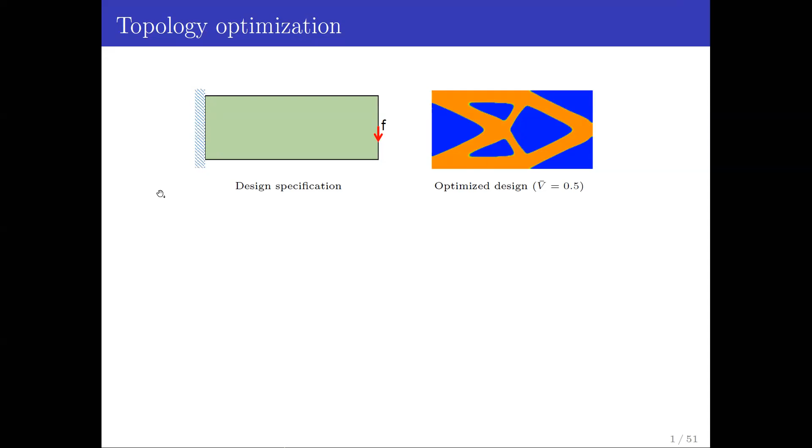Here I show you an animation. Starting initially with green color, it gradually evolves into blue and orange, that is void and solid. You start with intermediate density. Density here is a pseudo representation of different types of material, from intermediate density to void and solid. This density-based topology optimization is perhaps the most widely used method.

For example, this can be used for heat conduction. You can see very intricate details emerge as a process of topology optimization. You can also use it for thermal fluid problems where we solve Navier-Stokes equations. Here you can see very complex geometric features emerge.

These are component designs, as shown in a paper where they used a giga-voxel method to design aircraft wing structures. You can see very complex structures can be used. By now, topology optimization is a quite mature method.

So we're looking at density-based methods. There are other methods like level set, phase field, or topological derivatives. As you can see, complex geometry or topology can emerge from this software or tool.

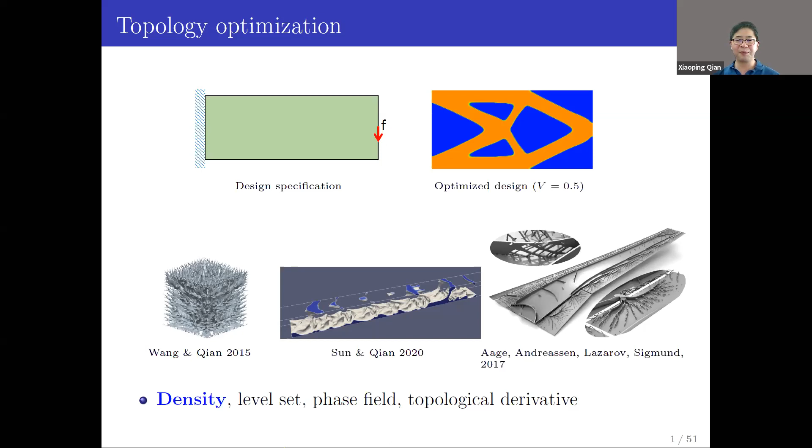So how do we fabricate it? That's where additive manufacturing comes in. You can see here a very nice part has been built. Additive manufacturing is capable of building parts of very complex shape without part-specific fixturing or tooling.

The reason it can do so is because it introduces something we call sacrificial support structure. Support structures here are only to support the part building process. It itself is a waste of material and waste of build time. If possible, we would like to get rid of it. Also, in some manufacturing processes, such as metal additive manufacturing, getting rid of this support structure can be a challenge. In metal parts, to remove support you would have to use wire EDM, which has accessibility issues and requires special tooling for removing metal support structures.

So the question arises: is it possible to design these parts so that they can be printed without support structure? We want to answer the question: can we do topological optimization during the design stage so that the resulting design can be printed automatically? That's what we want to address.

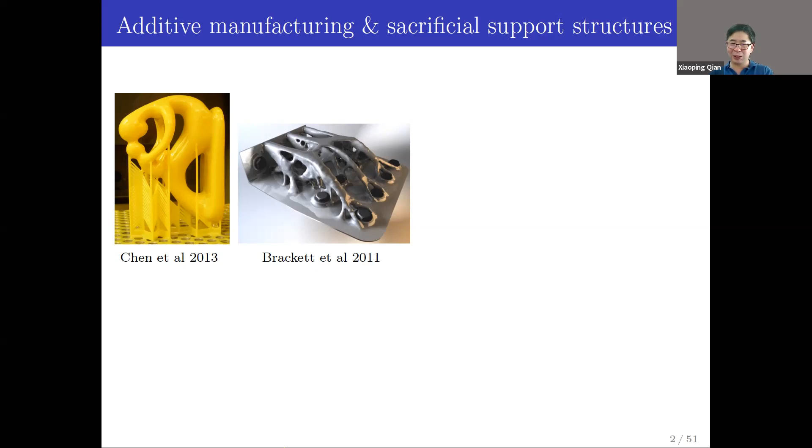The other type of problem we thought this could be relevant to is the case of support structure. As you can see, people are already looking at perhaps needing some porosity in the support structure. Depending on load, we have lighter materials, so we have higher porosity. Then we want to ask, can we design in a more principled method, based on mechanistic design or topology optimization, to design the support structure?

Here you can see this utilizes the idea of a tree to support this structure. Can we also use a mechanics-based design to come up with the support structure? Keep in mind, these trees are designed so that they meet a particular overhang angle, so the part can self-support. So the idea is you want the support to self-support.

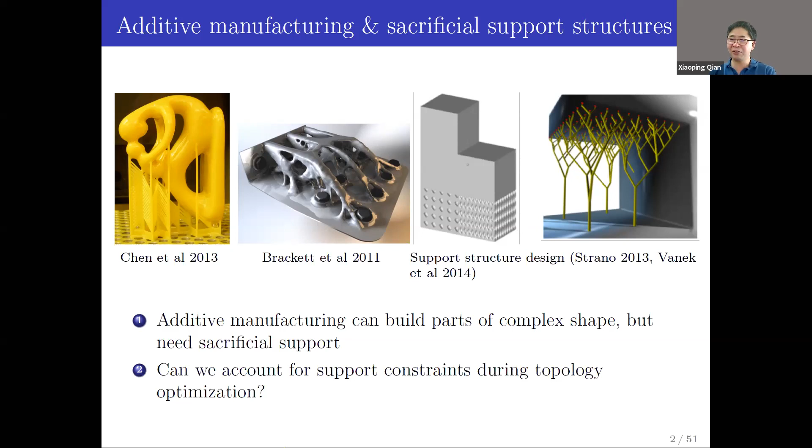So you don't want a support structure for a support structure. This is a problem we want to address. We want to account for additive manufacturability during topology optimization. So how can we account for this support constraint during topology optimization? That is what we want to address.

Let's look at the technical issue we're addressing. This is a very common MBB beam. If you're looking at this structure, you can see where you need support structure. Looking at boundary C, perhaps you don't need support because you're facing up. Looking at boundary B, you're facing down, so you do need support. Looking at boundary A, you may or may not, because it depends on the overhang angle of the part and also the process capability. You may or may not need support here.

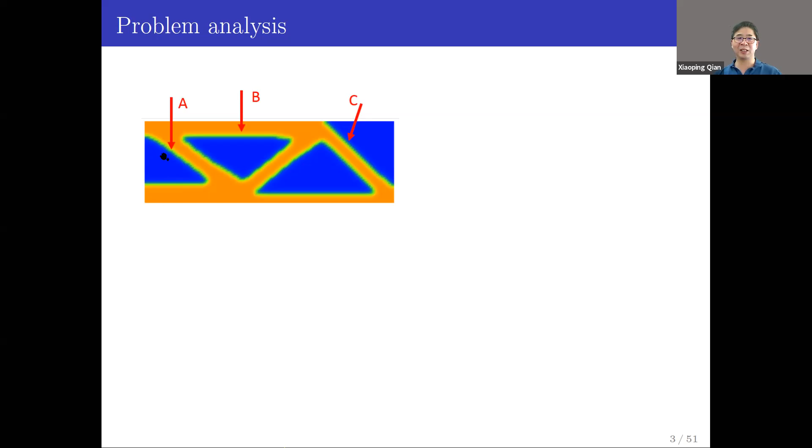So the challenge is, to determine where you need support, you really need to know the boundary slope. But in density-based topology optimization, there's no explicit definition of boundary because each element or node's density evolves independently and the boundary is evolving. So how do you relate this support to a point-wise density in a differentiable manner is an interesting challenge.

There are other methods, for example based on filtering, that are not necessarily using a gradient-based approach. We're interested in using a gradient-based approach for topology optimization. The reason is topology optimization commonly involves multi-million elements or nodes, sometimes even billion element nodes, so a very large number of optimization variables. Traditional evolutionary methods would be inefficient, so we prefer a gradient-based approach. How we relate this support structure to the density in a differentiable manner is a non-trivial issue.

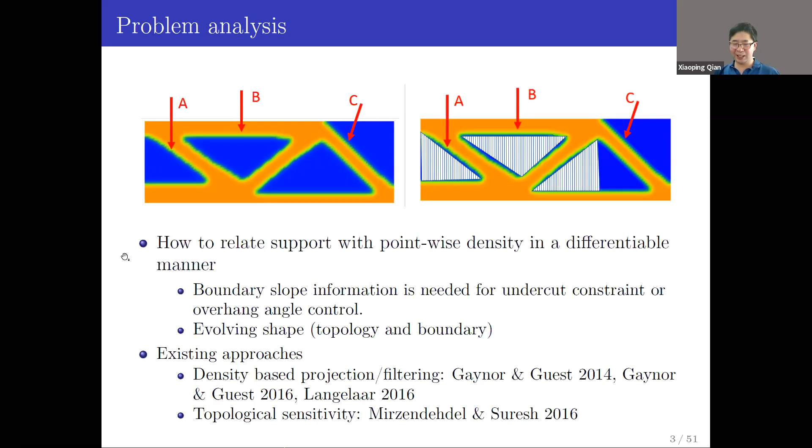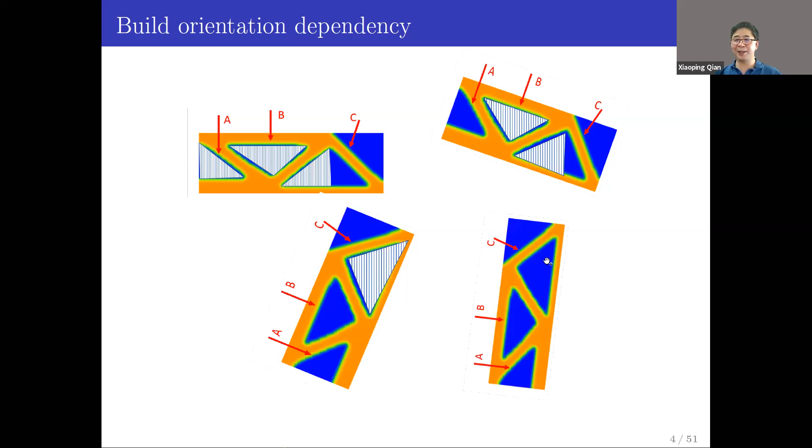If this isn't challenging enough, let's look at another aspect. This support structure apparently depends on the build orientation. If I change this domain a little bit, rotated, with build orientation still vertical, you can see this area no longer needs support because this part can self-support now. If I rotate this part the other way, only this part needs support, these do not need support. If I rotate this domain slightly more, like here, you can see even in this area we do not need support.

So you can see the support volume is actually not differentiable with respect to orientation. How can we handle that during topology optimization? I think that is an open challenge.

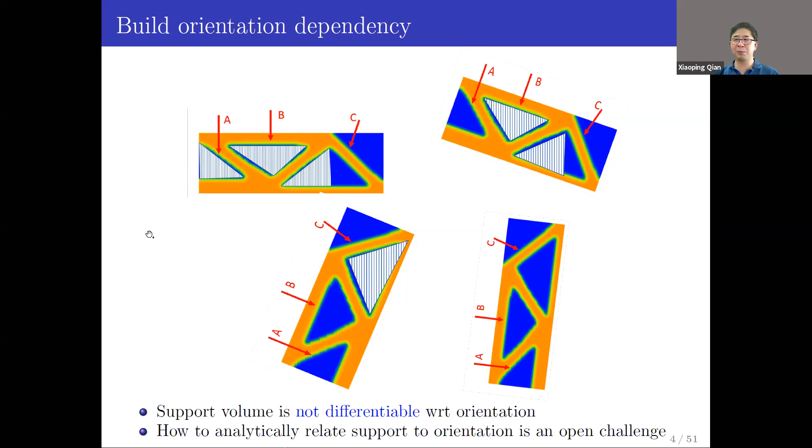Right now there's a lot of active research trying to tackle this issue, but people try to assume a build direction and then do topology optimization, or they sample build orientations. Here, we want to present all these issues with one formulation that is differentiable with respect to both orientation and density. This is what I want to talk about today.

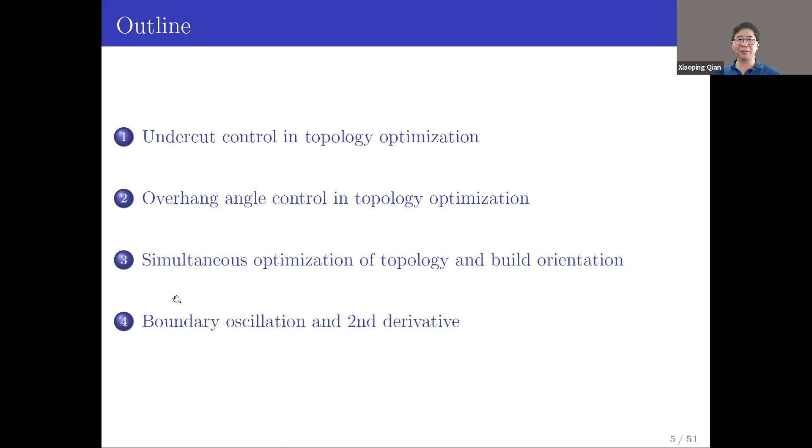So we want to talk about how we can control the undercut during topology optimization, how we can control the overhang angle so the part can self-support, and how we control topology as well as build orientation in the optimization process. We will introduce one formulation that can tackle all three problems, and then show you an artifact of our formulation and how we can use a second derivative-based measure to overcome this artifact. That's what we're going to talk about today.

What we're going to talk about can be represented through one concept we call the projected undercut perimeter. If this is a design domain, assuming build direction B, only this shaded area actually needs support. This is an undercut. The amount of undercut I'm going to characterize by the horizontal length, which we call the projected undercut perimeter. If it's 3D, that will be a horizontal area. You can see if this P becomes small, the amount of support becomes small. When P becomes 0, there's no support needed.

So how do we compute that? We know this density is 1, this area is 0. So the density gradient, this gamma representing density, points in this direction. Its dot product with the build direction gives cosine alpha. This alpha becomes the overhang angle, as you can see. So this directional derivative of density, or density gradient, with build direction B, dot product gives the overhang angle.

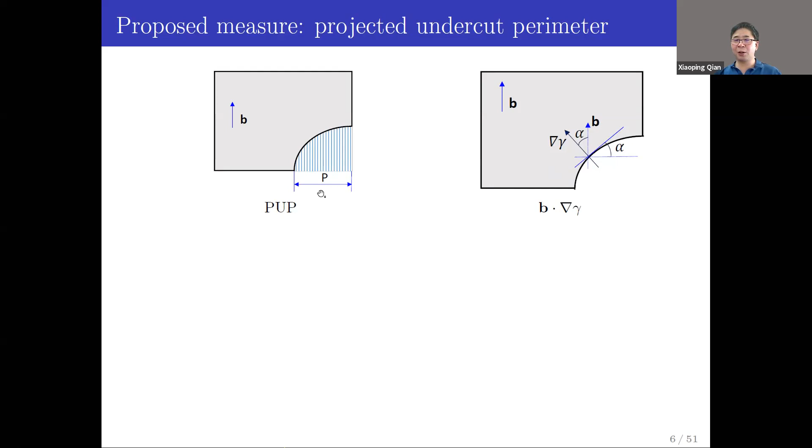So we compute this PUP, projected undercut perimeter P, by a volume integral. This quantity can be computed pointwise, and then this gives you overhang angle. So we suppress that facing upward where you do not need support. Then we do a volume integral. That's the idea of PUP. With this idea, we can compute the support structure bypassing the need for explicit boundary.

And we utilize the fact that in optimization for a converged design, density gradient only exists on the boundary. It vanishes from interior to exterior. And this formulation is differentiable with respect to both build orientation B and density gamma.

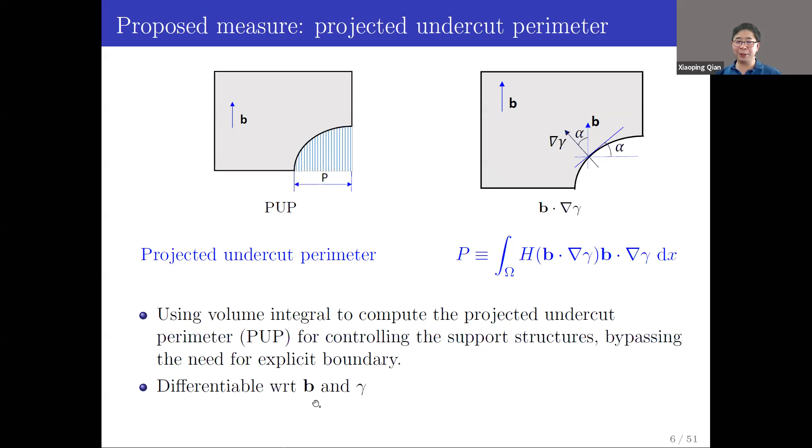So here, let me show you this example we showed you earlier. For this part, if I'm looking at the directional derivative here, you can see this B facing downward. So density goes from 0 to large, density gradient goes up, and the build direction up, so the directional derivative is positive. On the other hand, here is negative. On the side is negative, and here is positive. So here you can see only the positive area potentially needs support.

So I'm going to use heaviside to suppress those things. That's the positive that could potentially need support. If I do an integral of this one, that gives you the measure of P, the horizontal length. So here is the design, the horizontal length of 2. You see the measure of horizontal length, the sum is 2. The design domain is 6.

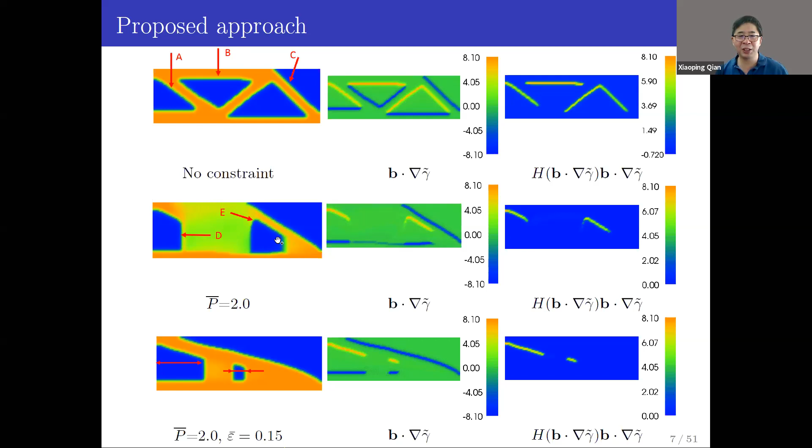So we have a geometric measure, this P, that characterizes the horizontal length or area you need support. And again, this is directional derivative with heaviside suppression. So here you just do a volume integral, and this thing is differentiable with respect to density. And if you have a grayscale design, you would have a similar measure here. Density gradient only appears on the boundary. So that's what you have.

And then we apply this formulation into topology optimization. This is like a classic optimization formulation, density-based. We're looking for displacement and distribution of materials. Here we solve a minimum compliance problem with equilibrium equations and a volume fraction constraint. Gamma is density. Here the PUP constraint is the horizontal length or area you need support.

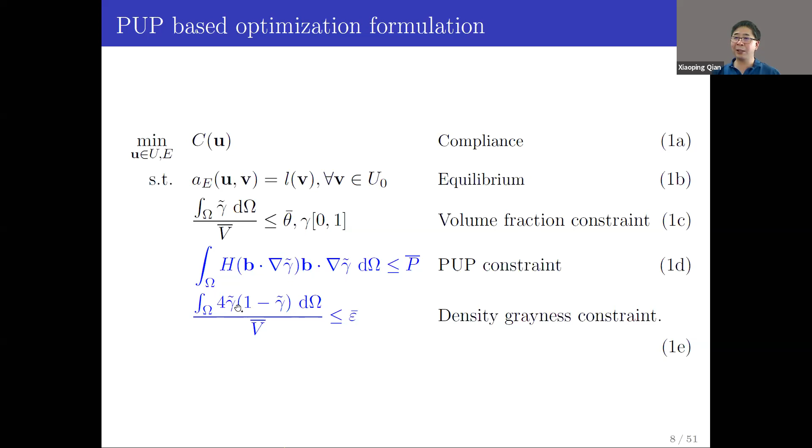It should be smaller than a threshold. And this is the grayness constraint. So when gamma equals 0 or 1, this becomes 0. Otherwise, we penalize intermediate density. And then here we can see how this one looks.

In a 2D design, you can see this is the allowed PUP constraint. Initially P is 3.5, 3, 2.5, and 2, a very small number, 0.1. So you can see that the allowed support structure becomes smaller and smaller. So we can see indeed this PUP controls the amount of undercut.

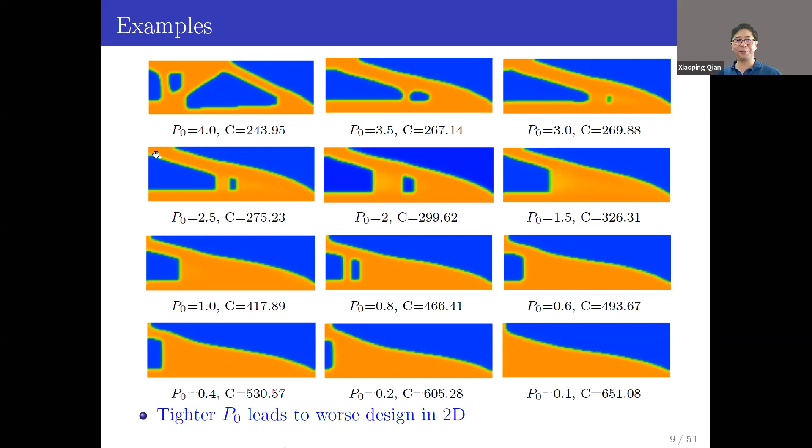And you can also notice as we tighten this P, the cost function goes up. So in 2D, when you tighten the constraint, the design's cost function is worse off, so the compliance here. And the same idea can be applied in three dimensions.

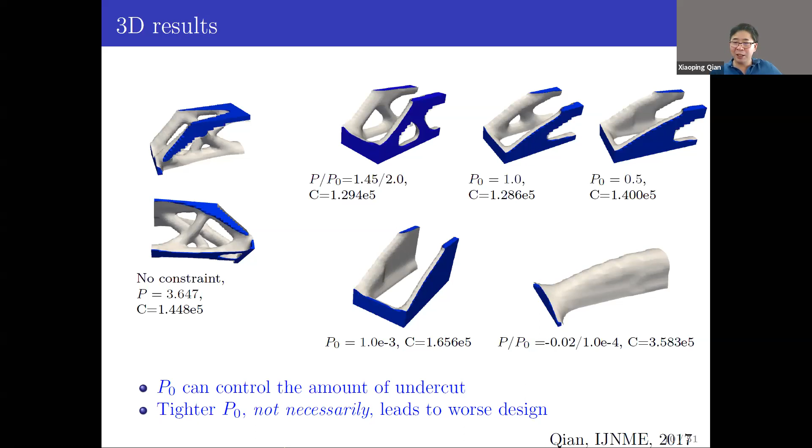The reason this one is not necessarily worse off when P is very tight, we believe, is because there could be many local minima in the 3D design. The 3D design space is much larger. So we can see this P formulation, or PUP formulation, really allows us to control the amount of undercut.

Now we would like to extend this formulation to overhang angle. The idea is still the same. Instead of just heaviside thresholding the downward-facing boundary, we're only thresholding its boundary slope that is smaller than alpha 0. So here we're looking at thresholding not the directional derivative, but rather the normalized directional derivative, because this one corresponds to overhang angle. So only overhang angle smaller than alpha 0 is measured in this part. When this part is smaller than the threshold, basically everywhere else is like this one, so the part can be printed without support.

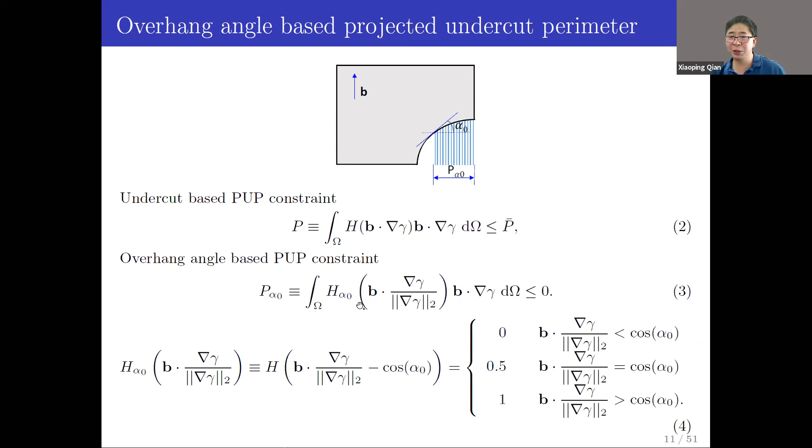So that's the only difference between undercut-based formulation versus overhang angle-based formulation, where we do Heaviside thresholding. With that, this is our formulation.

Again, the same previous standard formulation: compliance cost function, equilibrium equation, volume constraint, where here is the PUP constraint. We replace this Heaviside from positive and negative to a particular overhang angle.

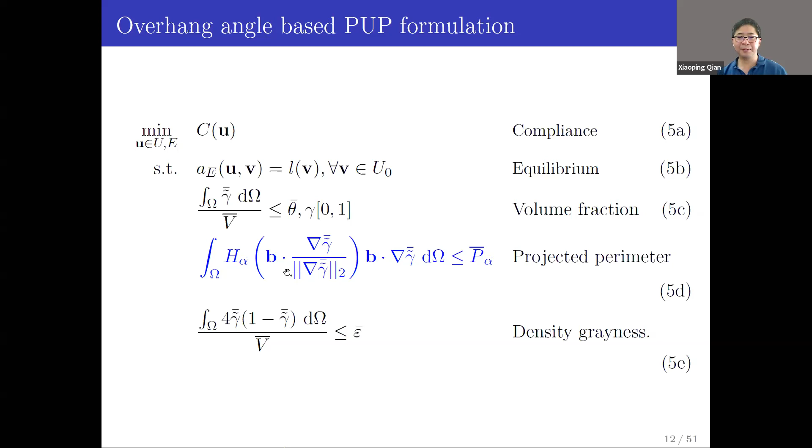Here's the example: this is a 30-degree overhang angle, and this is the optimized design. You can see if I take a directional derivative, that's shown here. Downward is positive, upward is negative. If I take this normalized directional derivative, that's what we have for Heaviside.

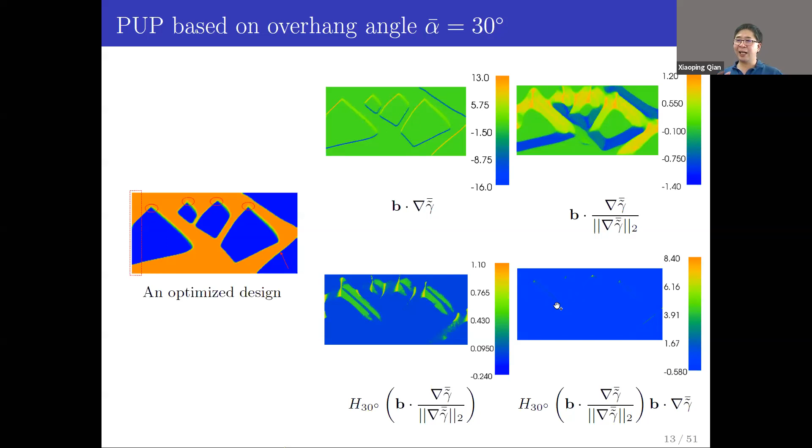We do a dot product, and that's where the constraint is violated. As you can see, this is very small. If you tighten it, that can effectively control the overhang angle.

And this is an animation. You can see initial intermediate density in green. As the optimization evolves, it becomes blue, which is void, or orange, which is solid. You can also see this design boundary meets the 30-degree overhang angle.

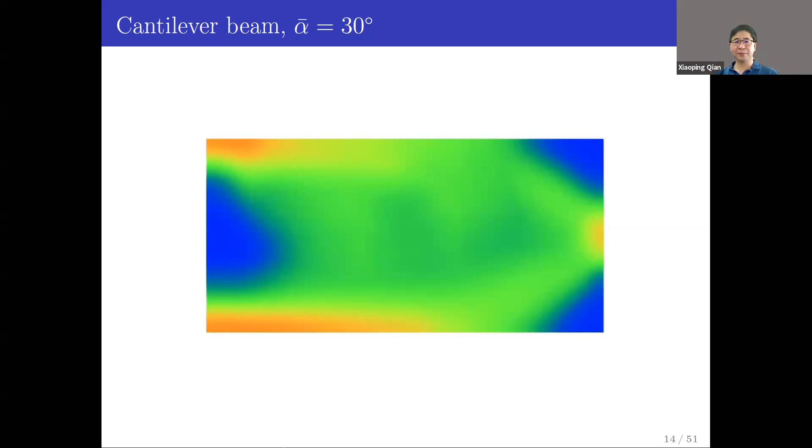Here is an example of different overhang angles. Without the overhang constraint, that's the design you see. You can see you have a downward-facing design, so this would need support structures.

Now if I impose 15 degrees, 30 degrees, 45, 60, to 75 degrees, and look at the minimum overhang angle of each design, you can see this evolution from A, B, C, D, E. Indeed, this P-alpha controls the overhang angle of the design, and the cost function goes up if you tighten this overhang angle.

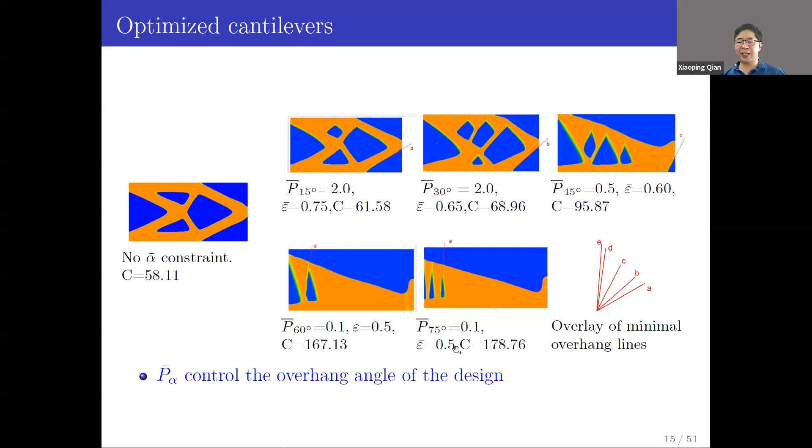One thing we should be careful about is sometimes you may notice that this type of design appears to satisfy the overhang angle everywhere, but you may not be able to print this design without a support structure on the side. To address this, we just impose a side zone constraint where we impose a normal.

Here we use boundary left-side normal, right-side normal. We use a Heaviside function where any surface facing basically downward on this side—if we do a projection, that's what we have.

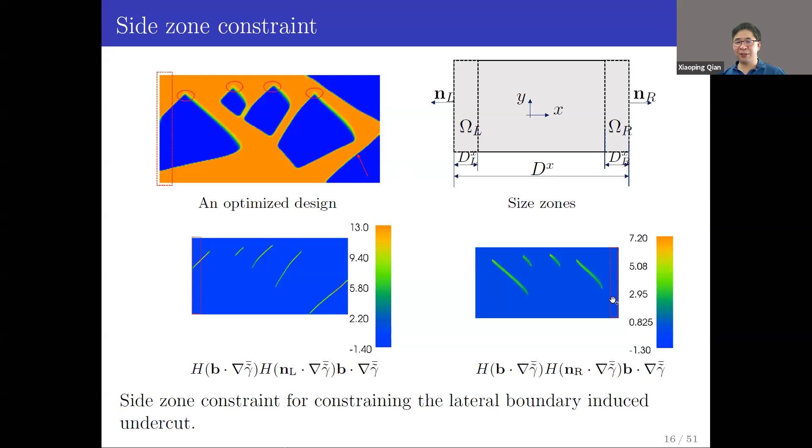If we control this one, you will see this side is controlled and that side will not be affected. And if we do this one, this will not be affected. If I impose the side zone constraint, that's what you have.

So here is what you have, and here is the resulting design. You can see different optimal designs could emerge if you impose the side zone constraint.

The design will self-support without much penalty to the cost function. This idea is readily extendable to three dimensions—here's a part. This part can self-support, and you can look at the animations here.

This is printed on an FDM machine, where commercial software using Dimension Elite automatically adds this black color support structure. If we use a part printed on the DaVinci 2.0 with an open-source FDM machine, you can see this part is printed on the machine—it can be printed without the support.

For this part, it leads to a substantial amount of saving on support structure. So we don't need this amount of material.

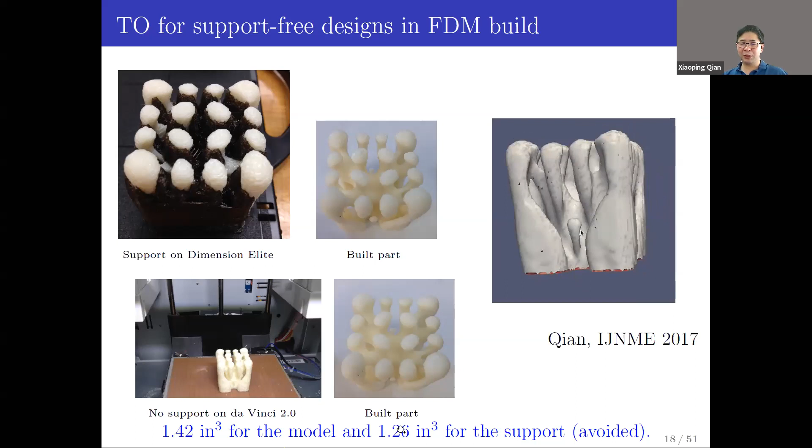Now we have an approach to control the part so it can self-support. Where can we apply this feature? Well, the obvious place is to use this to design support structures.

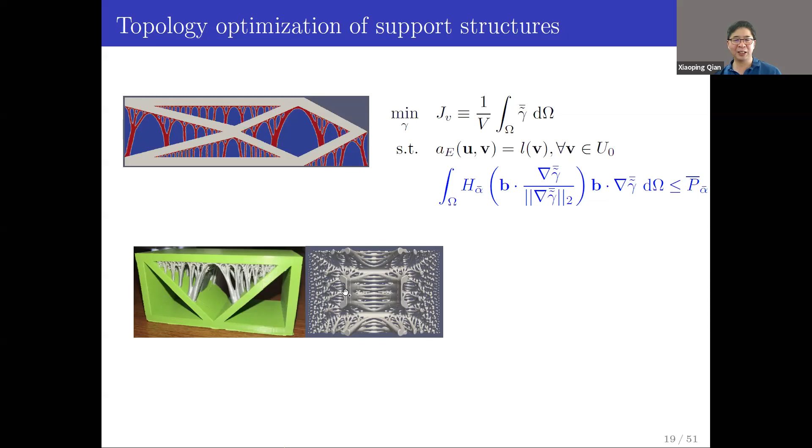This work was done by Francesco and Vlad here in my group.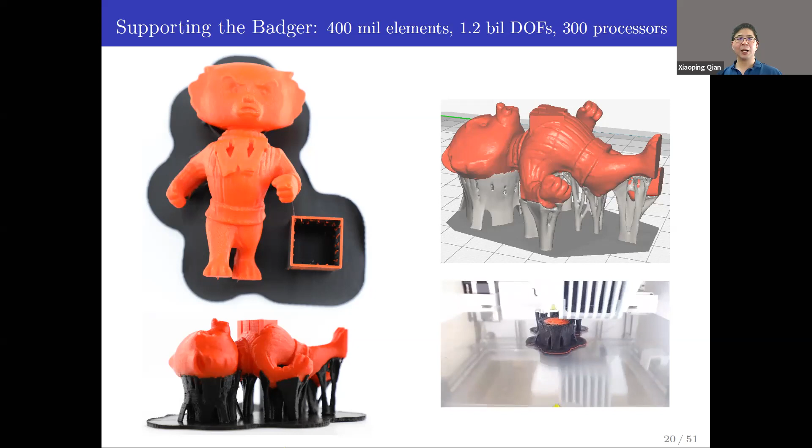Now I can show you a few more examples. Here we want to design a support structure for a dome, and this is top, like a hemisphere dome. This is the design support structure. Depending on the height of the dome, we get different structures here, and all these structures are self-supporting.

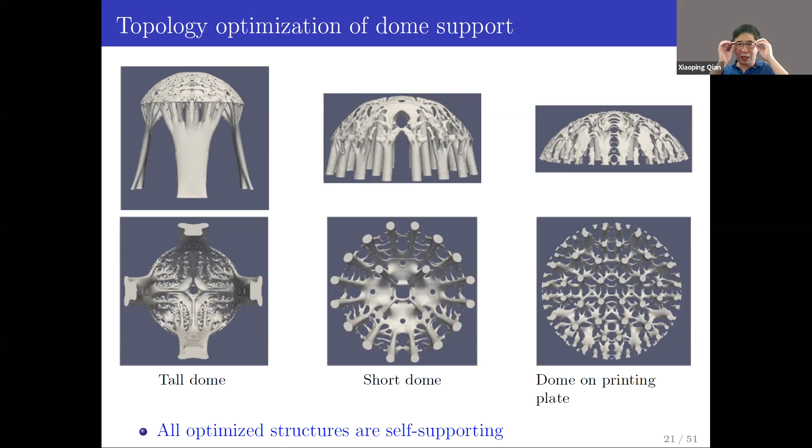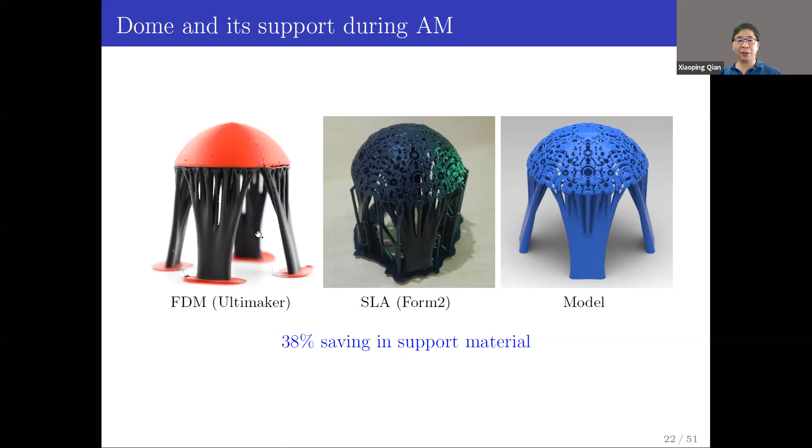One thing we noticed is that although we have this PUP constraint to design support structure so they can self-support, in practice our formulation, when we impose mechanical load under minimum compliance elasticity problem to minimize volume, it turns out the support structure can self-support. Our overhang constraint is rarely active. Here's the actual printed part in an FDM machine, an SLA part, here's a model, and here's a printed part. All these things can self-support.

Now with this, we get the capability of controlling slope for support control. We can also use this to control surface roughness. So the idea is the following.

If this is for a heat conduction problem, if I control the overhang at 30, 45, or 60 degrees, this part can be printed without a support structure, depending on the process capability of your machine, whether you need support or not. Now, sometimes you want it the other way.

Instead of all the part facing up, you want the part slope facing down. The reason or assumption is the following: when you have a part surface facing downward, typically the surface roughness is bad, so you have a very coarse surface. That could actually be advantageous, taken advantage of. When the surface is rough, sometimes you can transfer heat better, so you can promote heat transfer. That can be beneficial in thermal management applications.

So if you want downward facing surfaces for heat conduction, this sort of design you would have. Here we use the same formulation, all we need is to control the boundary slope. This is upward, this is downward, now you can control both upward and downward slope. So we can essentially have different ways of controlling boundary slope in order to enable support control or surface roughness control.

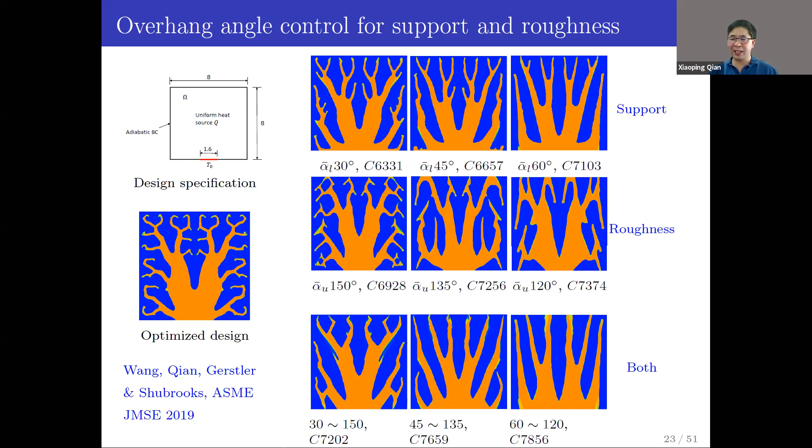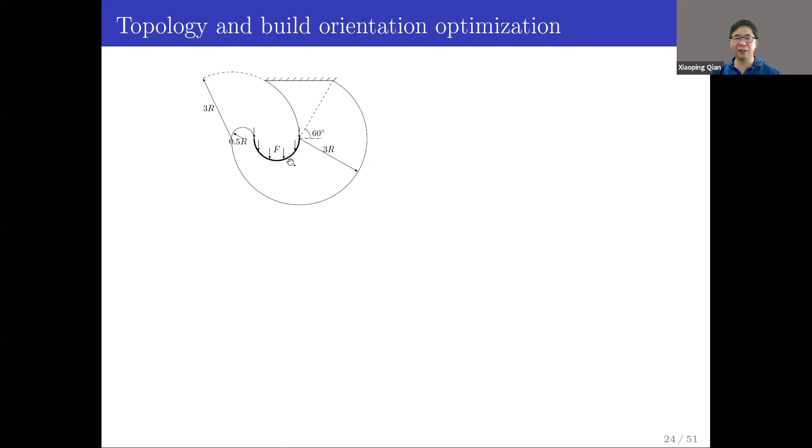Now we have explained how this PUP formulation enables undercut control as well as overhang control. Now let's look at how it can be used for orientation optimization. Suppose we have a two-dimensional structure. This is the design domain, here is fixed, we have a load, it's a hook. If I do not have any orientation control, this is the optimized structure. You can see for this kind of design, there's no particular orientation you can choose that can be printed without a support structure. So we want to find a structure that can be printed without support structure.

And here's what we found. B star is the optimal build orientation, here with 45-degree overhang angle, and this is the part. If I build along this direction, this part can be built without any support structure. So here we're using B as the build orientation.

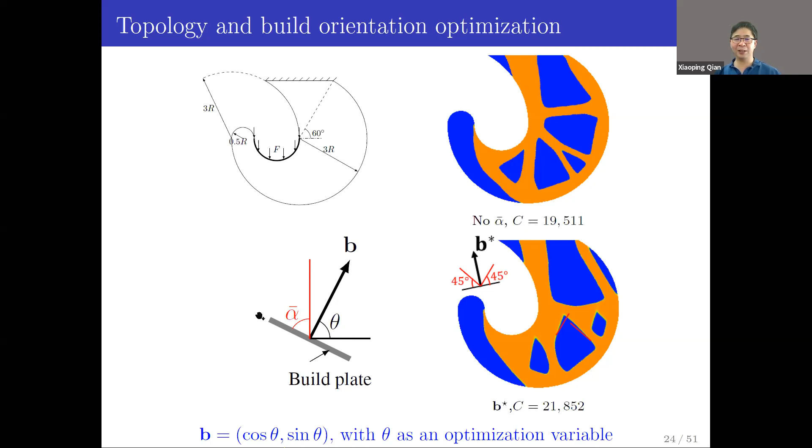It's parameterized by angle theta with respect to the horizontal axis. With respect to B, the build direction, you can define a horizontal plate, and then you have this overhang angle alpha. That's our notation here. Our PUP formulation defines undercut smaller than overhang, smaller than alpha, this is length, this is P. If you rotate, you can also define this projected length, that's the definition.

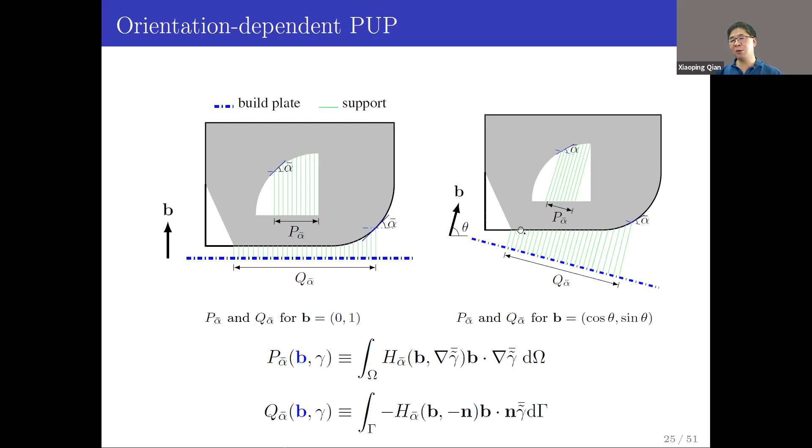Previously we assumed a fixed B, now we make B a variable, so this is differentiable with respect to B. In addition, we also define external support, this is the area that needs support based on density here. We define this boundary Q, which controls the support outside of the design domain.

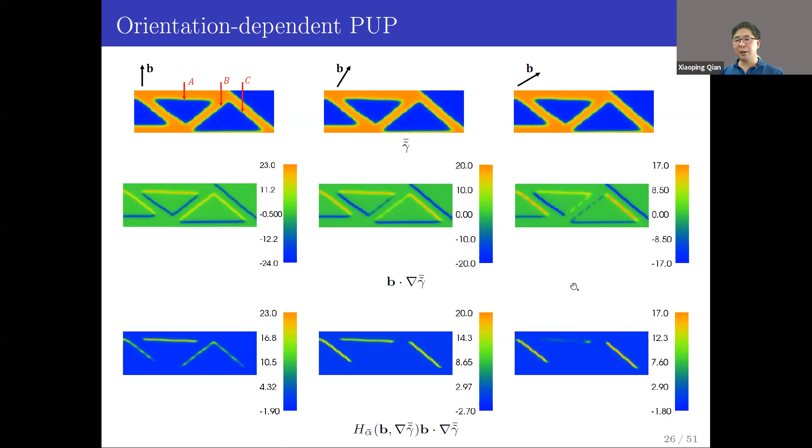Looking at this orientation change, you can see this part, the ABC boundary. If I change the build orientation B, the directional derivative changes here. For example, here it becomes a little lighter, here it almost vanishes, and here it vanishes. If you're using Heaviside, this part disappears. That is to say, this slope does not need support at all if you build along this direction. On the other hand, this slope needs support in this direction. So point-wise, the directional derivative is differentiable with respect to this build orientation.

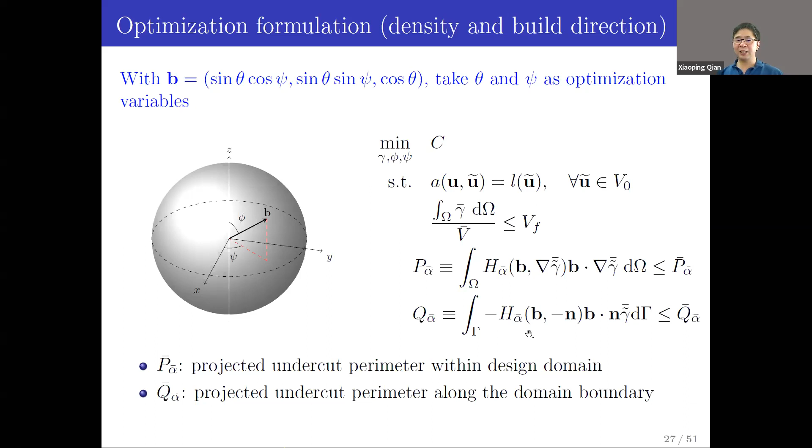And that's our formulation. Let's look at the beam here. If I don't impose any overhang angle, that's the design we have.

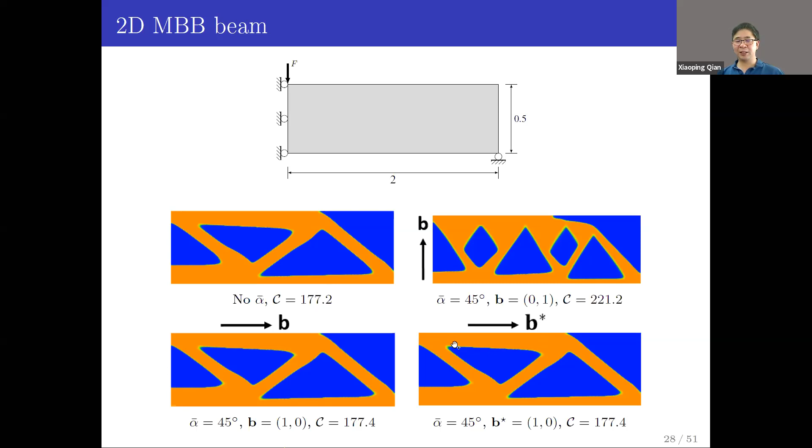Now with our approach, we can do gradient-based optimization. We found optimized build direction also along this design. So it's nearly identical to this design. You can see this optimized design and no constraint design are nearly identical. So orientation optimization is capable of finding the best orientation here for this particular example.

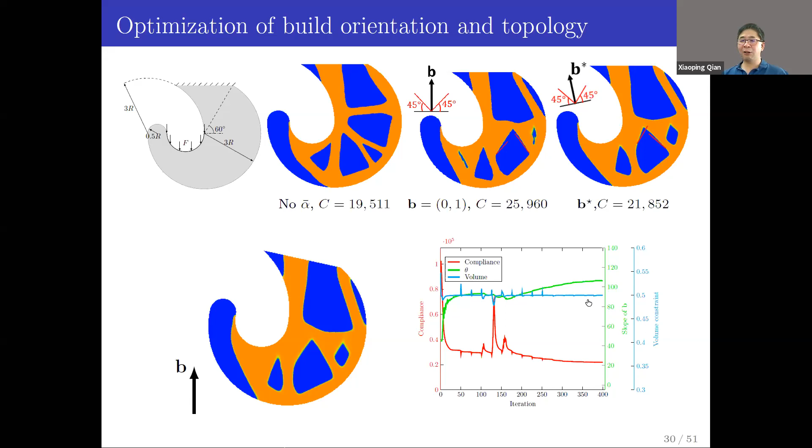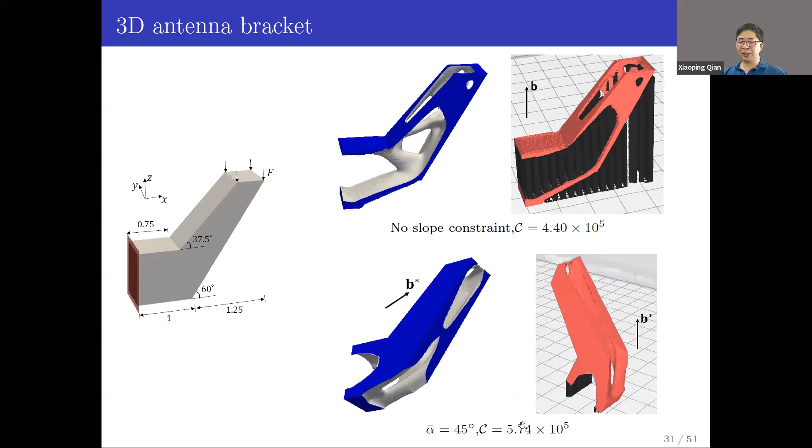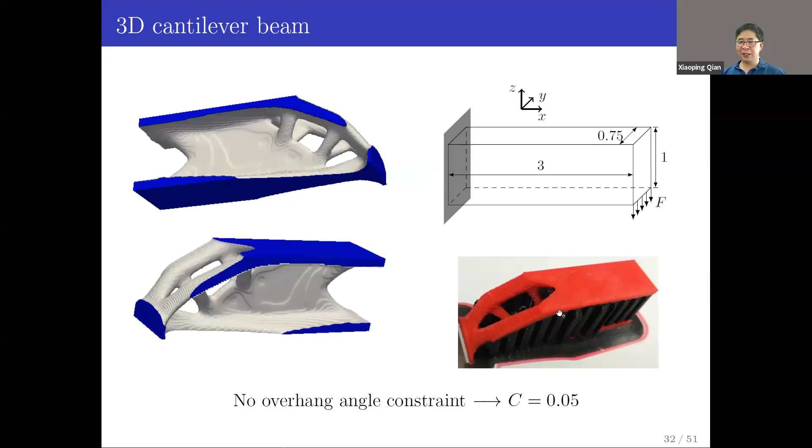And then here's the 3D beam. You can see this one, the optimized 3D beam, it needs support structures. And there's actually, in fact, a lot of support structure. If you don't impose any overhang angle, it needs a lot of support structures.

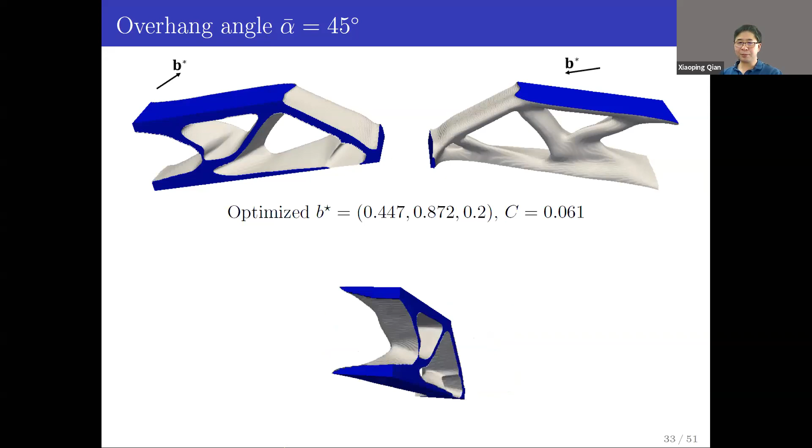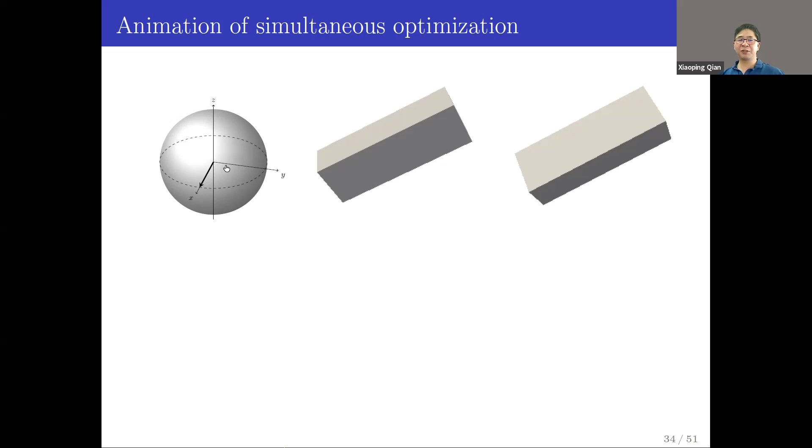And here is a visualization of the optimization process. We're visualizing orientation on the Gaussian sphere. Each point on this Gaussian sphere represents the orientation. And here is the design domain. You see density evolution, you see orientation evolution here. Different colors represent a cost function here.

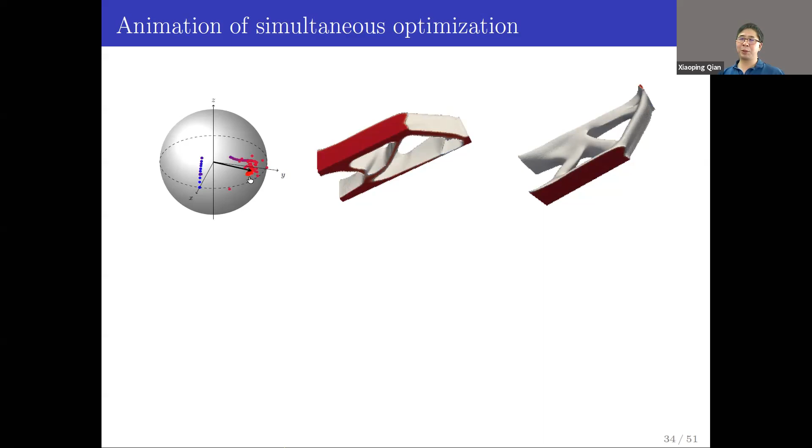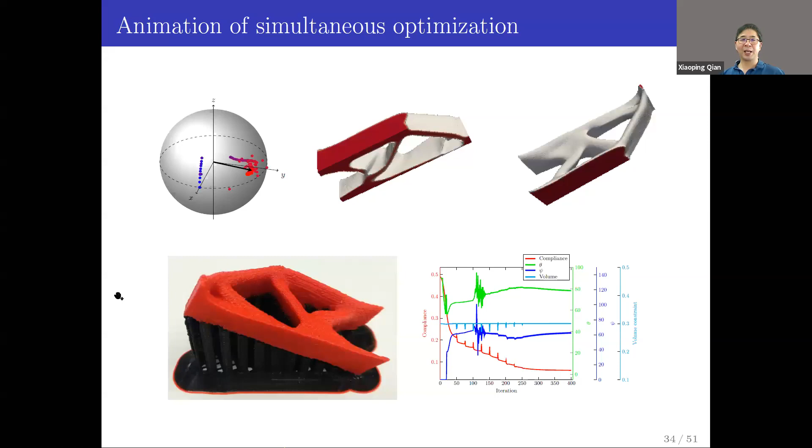You see convergent angle, and this cyan color is the volume constraint. All these constraints are active. If I fix this orientation and optimize build orientation, rotating it this way, the design domain becomes this.

If I take a cross section and cut it, you can see the part boundary along this red line. This red line is a 45-degree overhang with respect to this optimized build direction. So this boundary is along 45 degrees - that's the overhang angle constraint being active.

So this part can be printed without any support inside this design domain, but it does require a lot of support structure outside the design domain. If we impose our earlier formulation Q, which is external support, you can see this part does not need any external support.

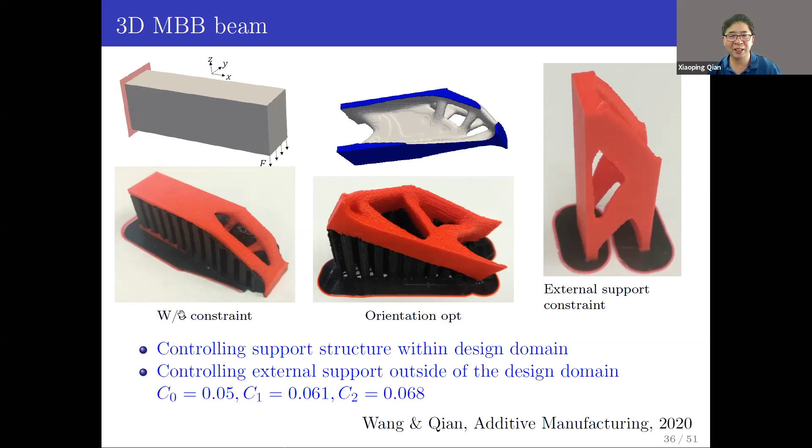So now I have shown you how our PUP formulation is differentiable with respect to density or orientation. It can be used to control undercut, overhang angle, as well as optimize build orientation. Now I just want to quickly go over an artifact of our formulation.

If we impose overhang angle, you can see this is perhaps 45-degree overhang angle. Everywhere the volume constraint and angle constraint are satisfied, except these 3 points where you have a downward facing point - the part cannot be printed here. Even with the integral formulation the constraint is fine, but you get this oscillation.

In our initial formulation, to overcome this issue, we increase the filter size. For example, at 15 you have this issue, at 20 the oscillation is somewhat suppressed but still a little bit there, and at 25 you don't have oscillation.

By the way, our formulation is also applicable to level set methods. This has been applied in the context of level set, and this oscillation issue also appears in level-set-based implementations. It has been noted by Allaire as the dripping effect.

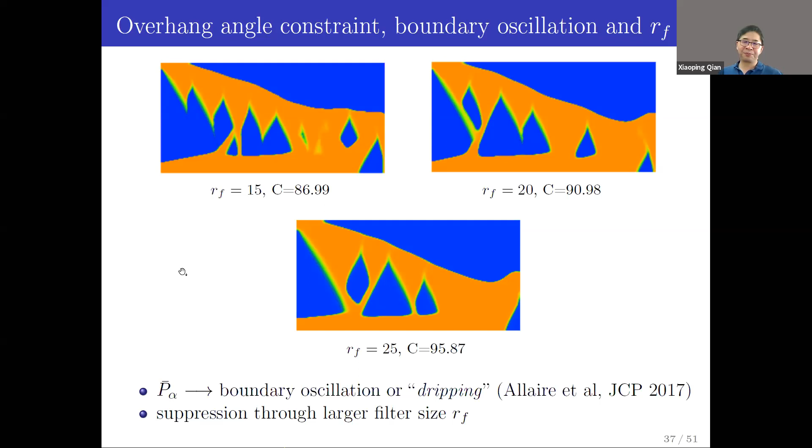So how do we overcome this boundary oscillation when we do this overhang angle based constraint formulation or density gradient based formulation? We recently took a look at this issue - this is work done by Francesco. Here is a design without overhang, that's what we have.

If with overhang, you can see point-wise you have constraint violation that causes this oscillation, making the part not printable. So how do we overcome this? This is the problem we want to resolve. If we observe this oscillation, this is the problem - how do we get rid of it?

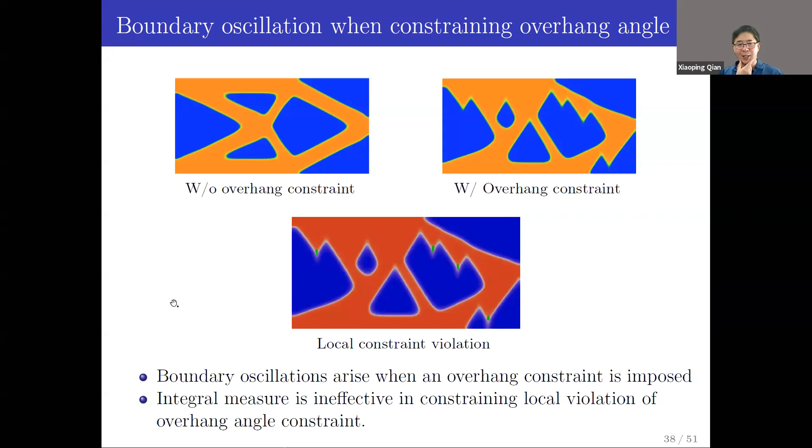So here's the idea we use: we want to characterize this oscillating boundary. In order for a boundary to oscillate, there has to be a tip, and of course if you have a tip, you also have a valley. This valley is perhaps somewhat similar to the top of this horizontal hole here. Now, how do we characterize these things?

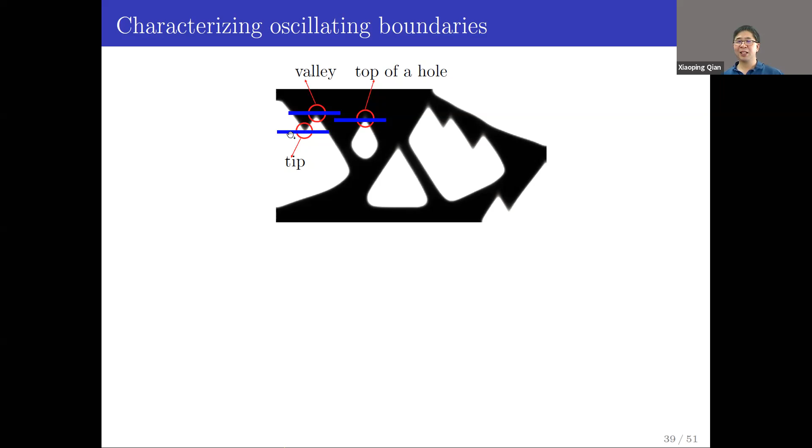If we draw a horizontal line and look at the density variation across it, we see the difference between the tip and the valley lies in the second derivative. For the tip, the density variation goes from 0 to 1 to 0. For the valley, it goes from 1 to 0 to 1. So the second derivative for the tip is smaller than 0, and for the valley is larger than 0. Of course, the top of a hole is also larger than 0, as is a short horizontal overhang.

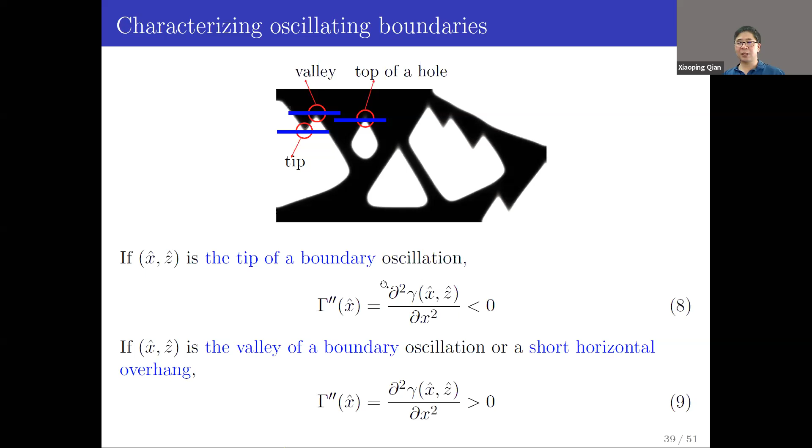So our assumption is: if you have boundary oscillation, you must have a tip. If we could just penalize the tip, we essentially get rid of the valley too. So that's what we call the second-derivative-based measure to remove oscillation - here is our oscillation measure using the second derivative. The second derivative extracts the tip, and the first derivative extracts the boundary.

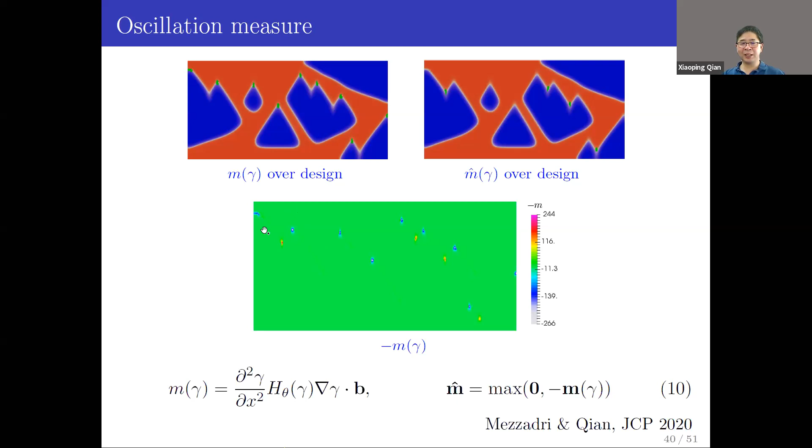Together, we can separate the valley from the tip - this is the measure, positive and negative here. More specifically, looking at the first derivative, that's this one; the second derivative shows positive and negative separating tip and valley. If I suppress the positive line, basically all the valleys have been suppressed. Looking at the directional derivative heaviside, this extracts all the tips and valleys based on the overhang angle.

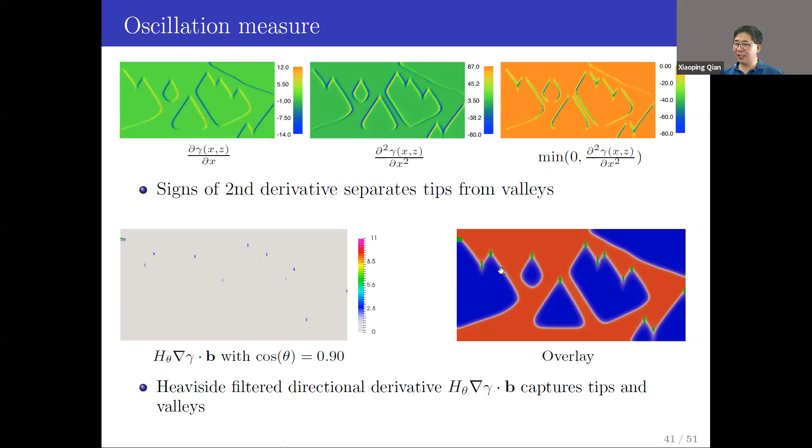If I do multiplication, then essentially I can extract the tips, so that allows us to penalize it. There are perhaps multiple ways to penalize this oscillation. We use two strategies: one is filtering, where we only penalize this density when there's oscillation, so this density is large only when the oscillation is large. Or we penalize with a cost function - integral of the oscillation using a P-norm, so that this is differentiable, designed so it can be used in a gradient-based formulation.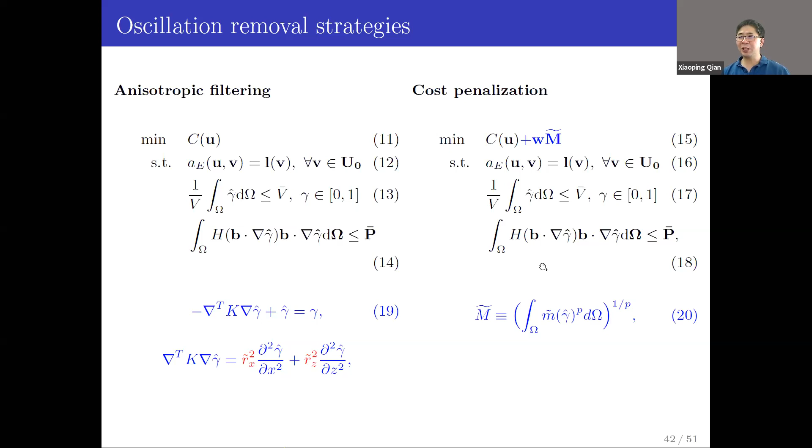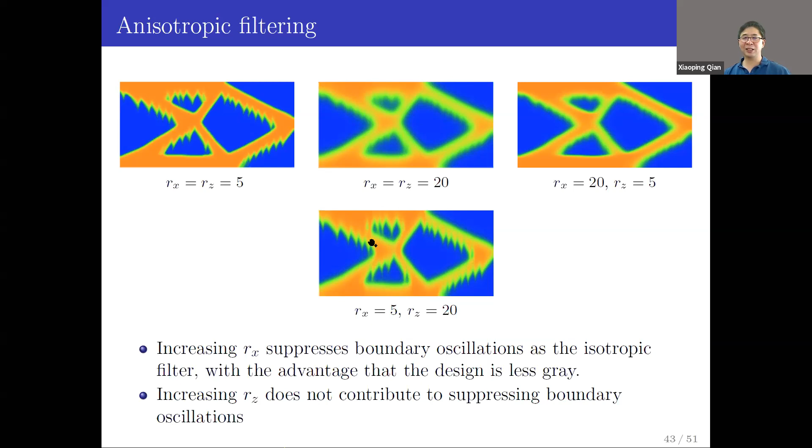Let's look at filtering. Here we're actually looking at anisotropic filtering. In our earlier formulation, if we use isotropic filtering, for example 5 to 20, this oscillation has been suppressed, but the design becomes a little bit gray. Now if we're only using large filter radius along the X direction, we also have the effect of suppressing the oscillation, but Z is small, so this makes the design a bit sharper, keeping it less gray. Increasing Z does not contribute to suppressing the boundary, as you can see here. That's why we use anisotropic and adaptive filtering.

So this is our formulation: if the oscillation is large, we increase this filter radius in the downward facing face - this is directional derivative facing the downward face. If the oscillation is small, we reduce the filter radius, allowing hole nucleation and topology evolution. So one control increases the radius, one controls reducing it.

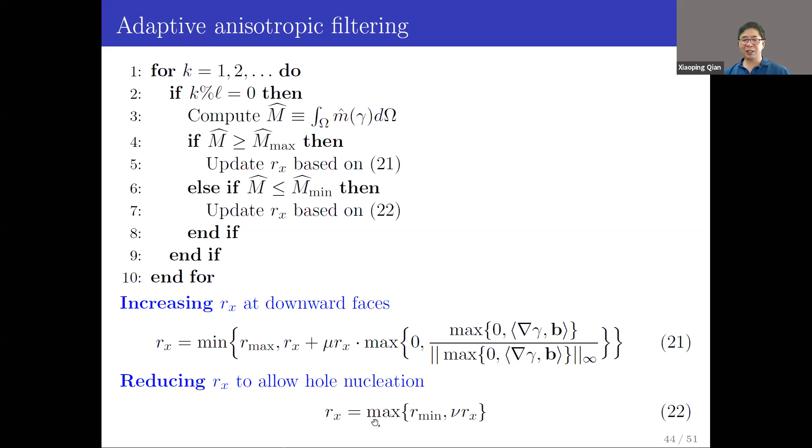Here's the design at 30 degree, 45, 60 overhang angles. This is with anisotropic filtering, and here is with cost penalization - you can see these are different designs. If you compare without the second derivative formulation for the cost function, you can see this delta C. Typically this leads to a better design here, and especially at high overhang angle, the design is substantially better with this formulation.

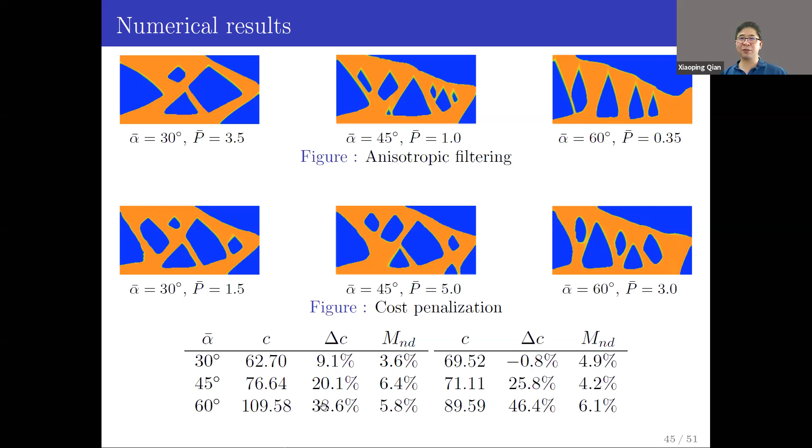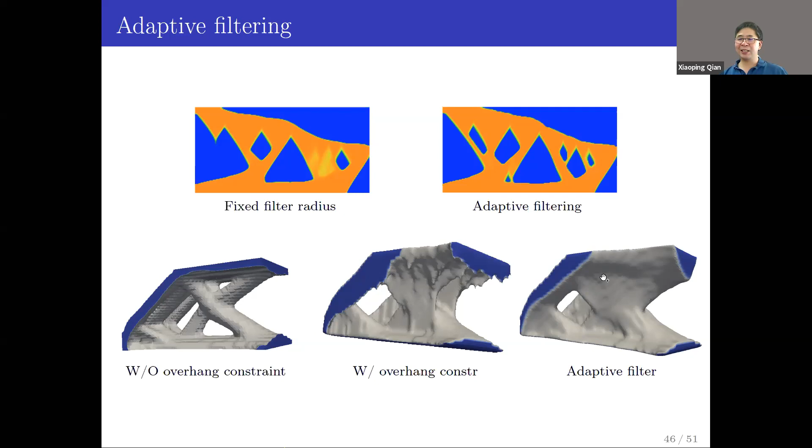With adaptive filtering, if you have overhang angle with large adaptive filter radius, this is the design. For 3D design without overhang angle constraint, you can see this one needs a support structure. With the imposed overhang angle, you need this 3-dimensional oscillation. With adaptive overhang angle, this part can be designed without support structure - it can be printed without support structure. And here is adaptive filtering.

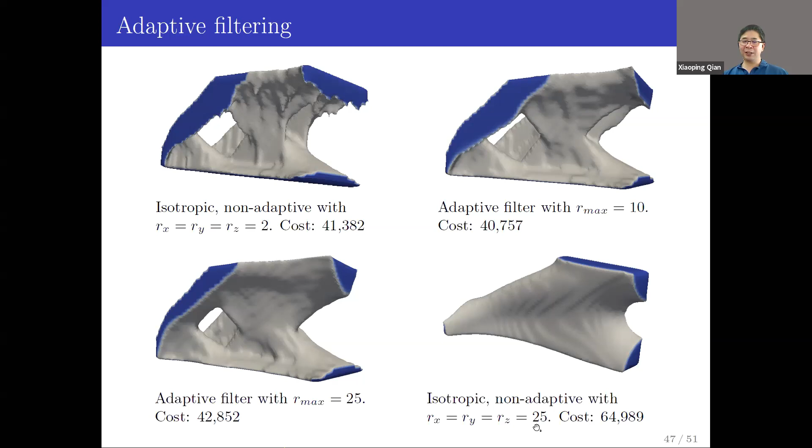Using non-adaptive filtering with a smaller filter, you have oscillation, and with a large filter, that's what you have - still perhaps a part that cannot be printed. Increasing to 25, that part can self-print. If we use isotropic filtering globally at 25 in all directions, this cost function is much worse than the anisotropic one. This is the design you would have.

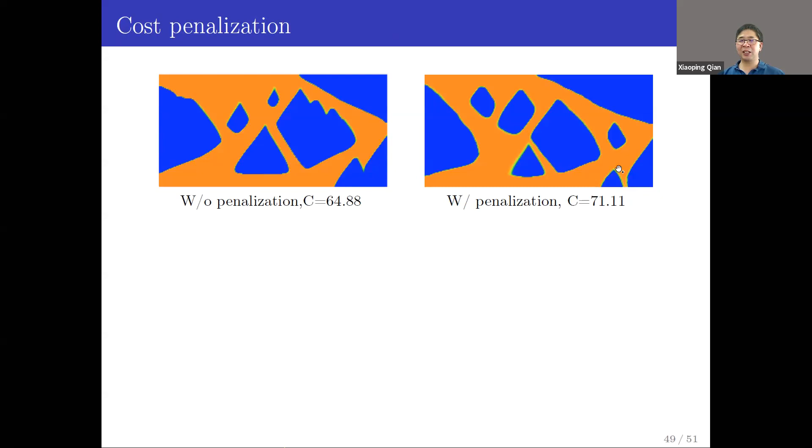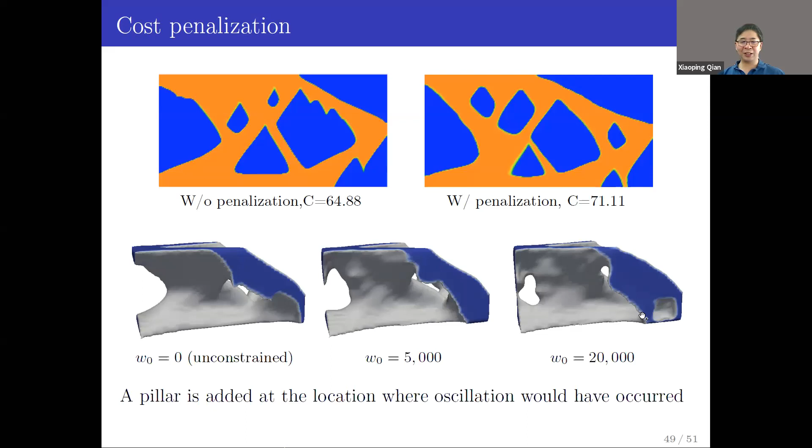In summary, we have presented a formulation we call the projected undercut perimeter. It has specific geometrical meaning, which is the horizontal area that needs support. Numerically, it is the volume integral of heaviside density gradient. It is one constraint, so it can be easily incorporated into optimization. It is easy to compute, so it can be implemented in both 2D and 3D. It's differentiable with respect to density, so it can be used in density-based, gradient-based topology optimization. It is differentiable with respect to orientation, enabling simultaneous orientation and topology optimization. It can be applied in level-set based formulation as well, even though we implemented it in density formulation. We demonstrate this measure for undercut control, overhang angle control, as well as build orientation optimization.

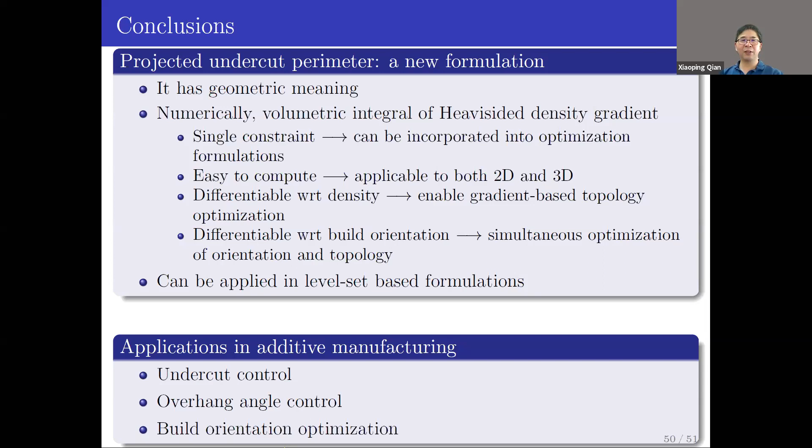If you're interested in more details of this work, you can see these publications, initially appeared in 2017. I want to thank our student and collaborator Francesco, Vladimir for the support structure design, and Cunfu for overhang and orientation optimization, as well as Francesco for the second-derivative-based measure. That's all I have, and I want to thank you for your attention.

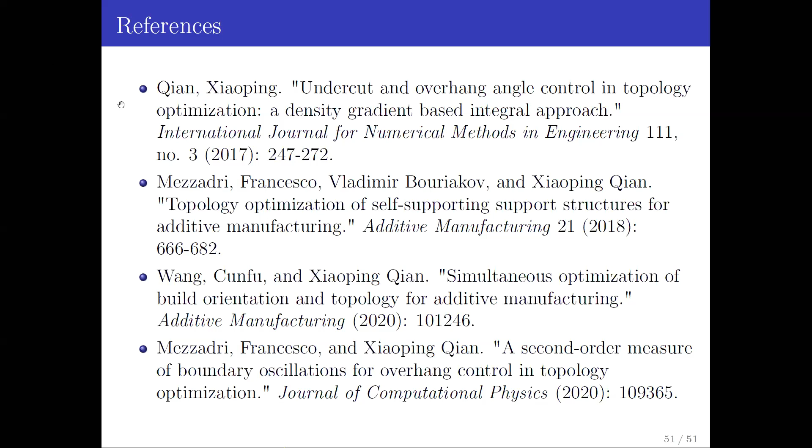I see there's something in the chatting window. Yes, it's from Charlie: can the additive filtering method also be used to remove fragile regions with small feature size from the result of topology optimization?

Do you see the question? You click on the participants icon, then the chatting window is at the bottom of that participants window. Okay, so maybe do I need to stop sharing screen in order to see it? Not really, but I can read the question for you if you want.

Please. So the question from Charlie is: can the additive filtering method also be used to remove the fragile regions with a small feature size from the result of topology optimization?

Topology optimization, small feature size - is this question about feature size control? I guess it's about the application of the additive filtering method. Hi Xiaoping, let me ask you.

Sure. I think the question is like, you're using the second derivative to evaluate and detect some of the regions where you need to penalize. So I'm thinking about whether it's possible to use a similar measurement to penalize those fragile regions with small features. I think it is possible, especially since for those small features, if you have a second derivative, you just penalize it. But here we assume a second derivative along a particular orientation. This could be extended.

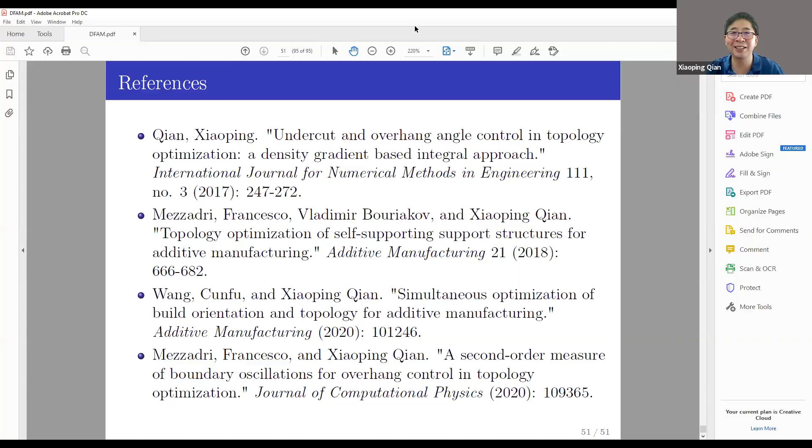Okay, so the question is: the oscillation seems to be some inherent problem in the formulation involving the second derivative. I think this is the first formulation we've seen, the geometric formulation. Let me read the question - oscillation seems to be a potential inherent problem of the proposed approach. So the question is whether second derivative penalization is the way forward, or should future research be devoted to finding new ways...